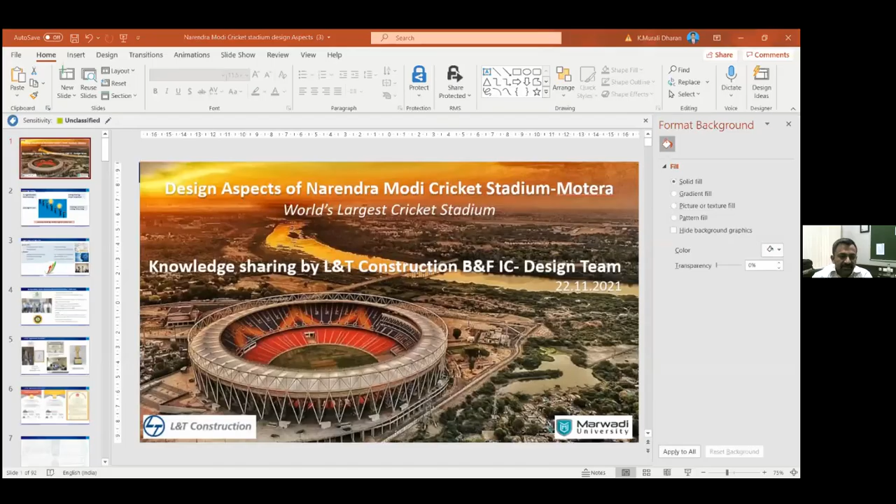So I think, Amit sir, we are done with the introduction of the experts. Yes, okay, so with this introduction, however, due to time constraints, it may not be complete. However, we have put our best efforts to do the needful for the audience because it's very important that to whom they are listening, it should be given a very clear introduction. So I welcome all the experts together at this moment, and now it's over to you, sir, for carrying on with the session. Thank you, sir. Thank you very much, Dr. Ankur. It was a very nice introduction, crisp and sharp. We are very much happy, and I think you communicated everything to all the audience. Thank you very much once again.

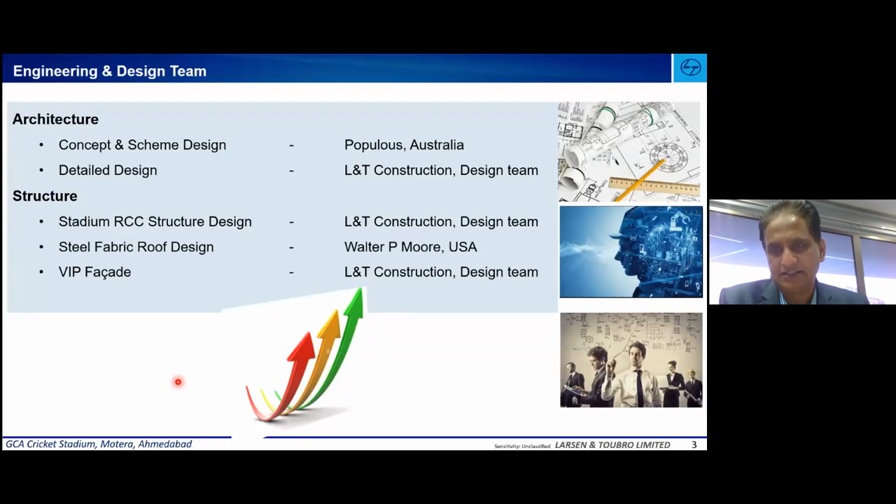As you know, this stadium has, other than the structure and architecture part, we need to concentrate on other aspects, not only the engineering. Along with that, we have to take care about sustainability, green building, green ratings. Therefore, this stadium has achieved IGBC green rating for gold. We aimed for silver, but we managed to get the green building rating of IGBC gold.

Total energy saving of 21%. We use water savings of potable water, sewage conveyance, etc. And 100% LED lighting was provided to reduce energy. More than 40% of the construction materials are procured locally, and 20% of the construction material is procured by recycled content. Usage of materials for low VOC and less carbon emissions was also conducted.

Engineering does not only have to complete the analysis and design. It also has the other part that along with construction, we have to design in terms of quality aspect, concerned with safety purpose. One of the things engineering can contribute is to avoid in-situ concrete and provide precast, so construction will be done in a controlled manner through precast practice, with only erection done on site. There will not be any pollution outside. Therefore, quality and safety can be achieved through design.

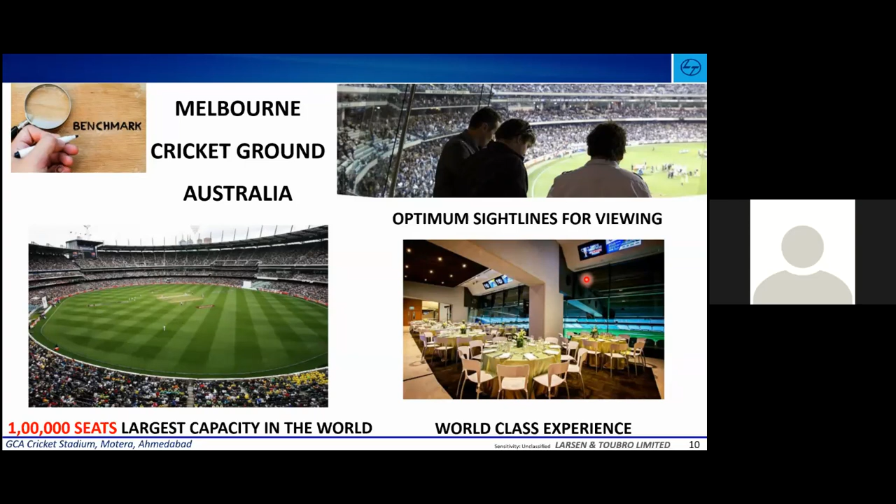When it comes to a stadium or any arena, what is more important is basically the viewing experience. This stadium, I'm happy to say, is perfectly designed as per the Green Guide. The Green Guide is the international safety code for sporting arenas, specifically cricketing arenas, given forth by the UK Sports Authority. At present, this is the only sporting guide available for us to take forward designs of this stature and nature. So what were the main issues we faced during the design?

There was a temple inside the stadium complex, and that was to be retained as it was considered sentimental to the development of the site and to the functioning of the site as well.

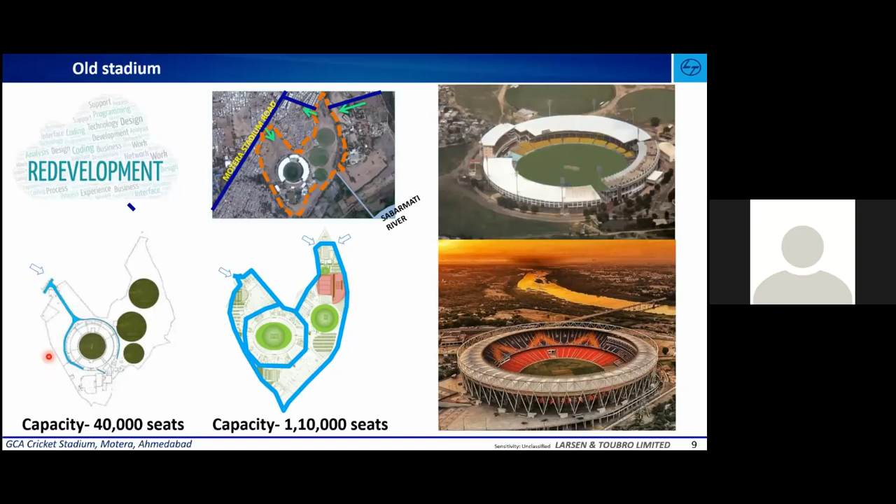The entry and exit - as I earlier said, there was only one entry and exit for this stadium when it had a capacity of 40,000, but now it has been built to a capacity of 1,10,000, to be precise, a little more than what we have achieved. So which means we need to cater to a large capacity.

We need to take into account circulation, exit and entry of vehicular traffic, pedestrian traffic, players' movement before the function, smooth exit after the function, and egress in terms of an emergency - how a person gets out of the stadium within the minimum stipulated time, which as per Green Guide is 8 minutes. So we had to intervene with a lot of new innovations like our Y column staircases and straight flight staircases, which I'll explain in further slides, to meet this requirement of exiting the stadium in 8 minutes.

As I said earlier, achieving the best viewing experience for every single person seated in this arena is the prime criteria of this design. Being such a large stadium, the field of play is also sized as per ICC standards and more or less similar to the Melbourne Cricket Ground.

When it comes to accommodating such a huge population, we can expect so many vehicles. Any code or norm states we need to design parking as per the requirement of the seating capacity. So to accommodate so many parkings, we have achieved nearly 3,000 cars and 10,000 two-wheelers.

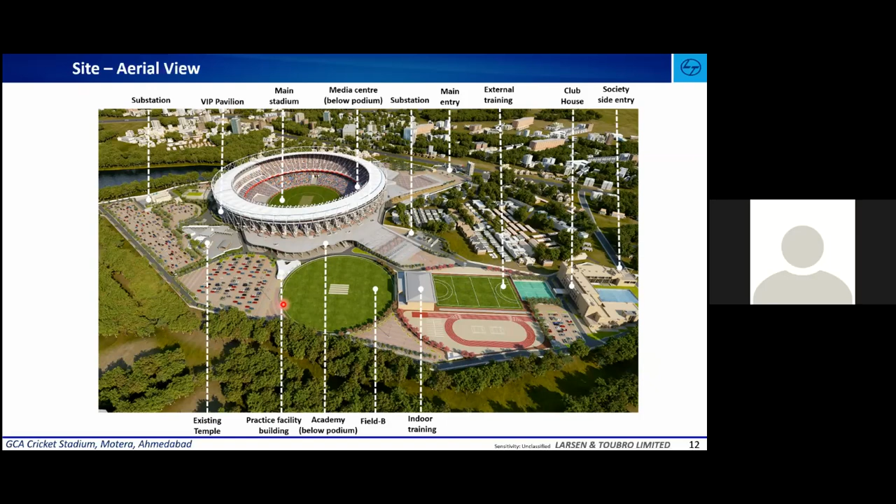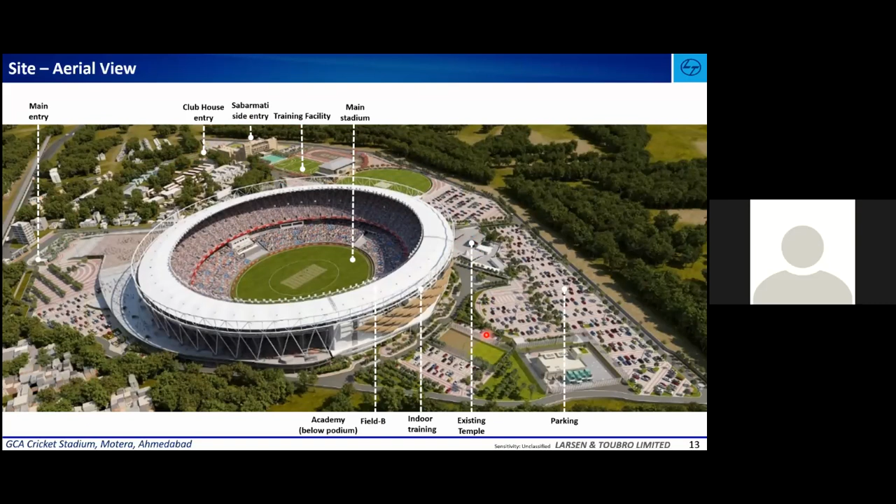There are three entry pockets to this particular site. One is from the Motera Cricket Stadium main road, which is the main entry because here we have the maximum intervention with the main road. The other is the Clubhouse Society Road. And there's a third entry created by the Ahmedabad Municipal Corporation to basically suffice the exit requirements of the stadium. This is the clubhouse, this is the main stadium, this is field B, and the existing temple and other facilities are functioning as part of this stadium complex.

Like I said earlier, there is a super huge podium here, with a main entry and a secondary entry. This is one of its first kinds in India, and this podium does not only cater to facilities for approaching the upper bowl and lower bowl, but also has additional food and beverage facilities and toilets for physically handicapped people. As you can see, this stadium is also designed for disabled people, which is the norm of the day.

We had to make sure that they do not have to go below a certain level to access the toilets. So we've tried to position all the toilets along the periphery of this large podium so that anybody sitting on this arena can really approach the toilet from here.

Any handicapped person who requires access can reach this toilet complex. This stadium is the first of its kind which can offer a 360-degree view while you stand in any corner of the podium, also enunciating other activities like air movement during actual match play conditions. This is the upper bowl access complex, the upper bowl access Y column staircases, one of the most unique features of the stadium. This is a precast structure which will be further explained by my colleague, Mr. Muralidharan, and there is also another straight flight staircase which leads to the upper bowl.

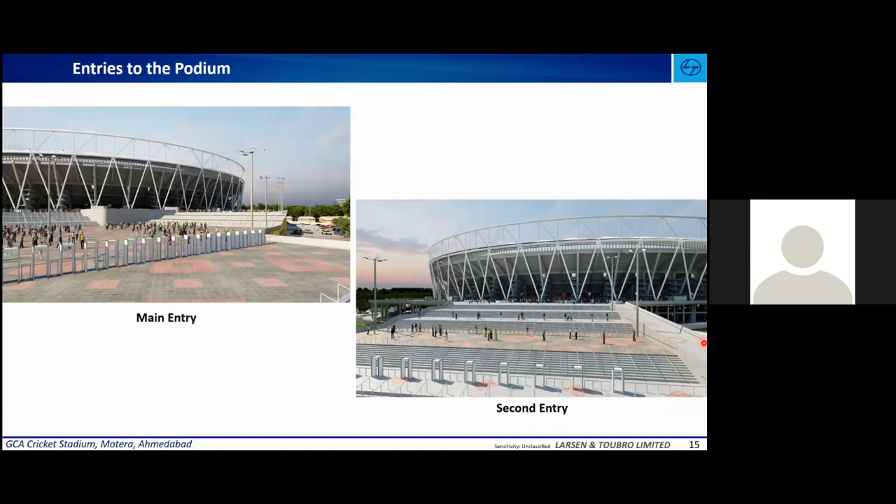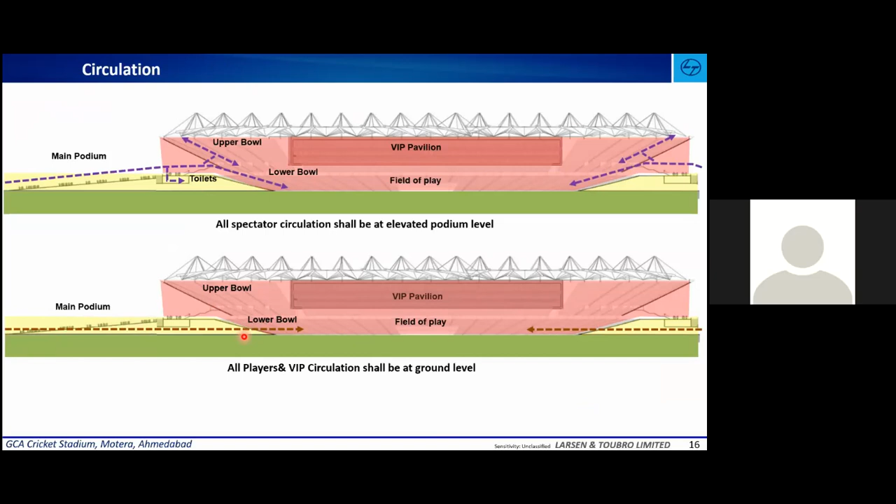The other unique feature is we have tried to basically split the circulation in the stadium into the vehicular movement or the players movement and the main spectator movement. The vehicular movement happens at the ground floor, whereas the main spectator movement happens at the podium. So at the entry, both are separated and taken out into separate approaches. The upper bowl has around 50 rows and the lower bowl has around 55 rows.

It seats around 50,000 seats in the upper bowl and 50,000 seats in the lower bowl. This is the upper vomitory staircase and this is the lower vomitory staircase. Roughly the height of the stadium will be around 35 meters till the top of the tension ring. The upper bowl is partially covered by a tensile fabric, which is 30-meter wide. The erection process and the design details of which will be shared by my colleague, Mr. Raghupati.

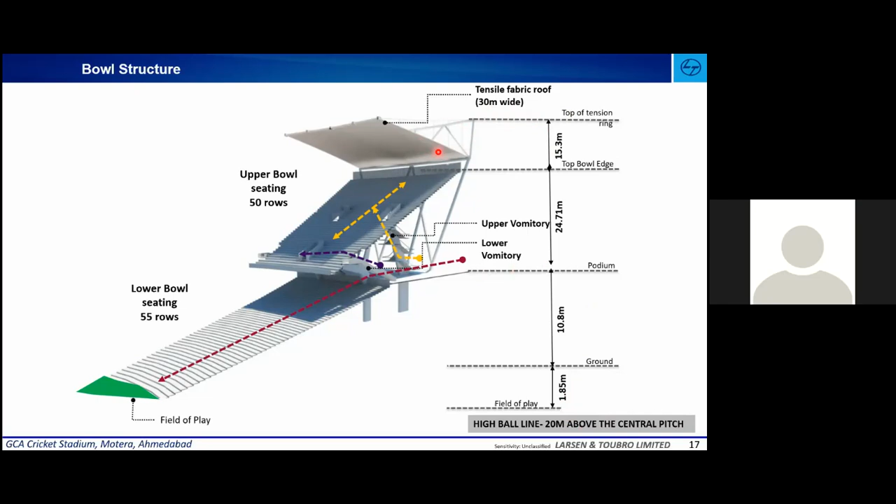Coming to the main building, the VIP pavilion. The VIP pavilion has at its ground floor the GCA office, the testing and support facilities, which are for doping control and first aid, and all those facilities are accommodated on the ground floor. The upper ground floor, as we call this level, is the players level, having the dressing rooms, the gyms, and the allied facilities.

The third level is the banquet level. This has a 400 persons banquet hall, and it also has a team players lounge. The fourth level is the VVIP suites level and the presidential suites level. The highlight of this is it is placed perpendicular to the field of play, where you can have a direct view of the pitches.

This particular stadium also has 4 dressing rooms, the reason being that it has to cater to the T20 format. When we have back-to-back 2 matches, two dressing rooms can be used for one set of match, and the other 2 dressing rooms can be used for the other set of match, which enhances the present playing format and which can also accommodate further conditions.

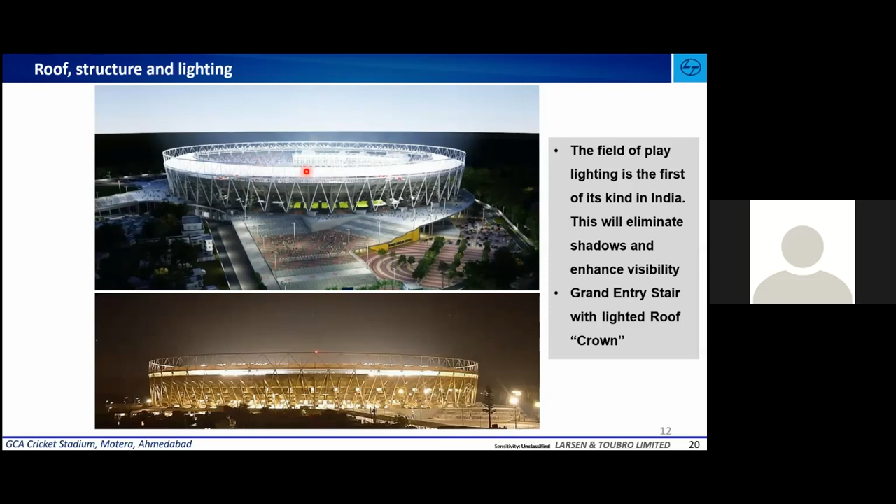This is a unique feature, basically full LED lights. This was done because high mast lights tended to create more light and shadow play during actual match play conditions, so this was done to remove the shadows while at play. This has also managed to create a kind of crown effect when viewed during night from a long distance when the lighting is fully on.

The other main building is the clubhouse. It has a 25 meters by 50 meters swimming pool, designed as per Olympic standards, around 2.4 meters deep. A squash court, badminton, table tennis, carom, cards, TV room, reading room, outdoor children's play area, lawn tennis, outdoor change rooms and sauna, and a kids pool.

There are 50 regular guest rooms and 5 luxury suites, which have additional dining areas as well.

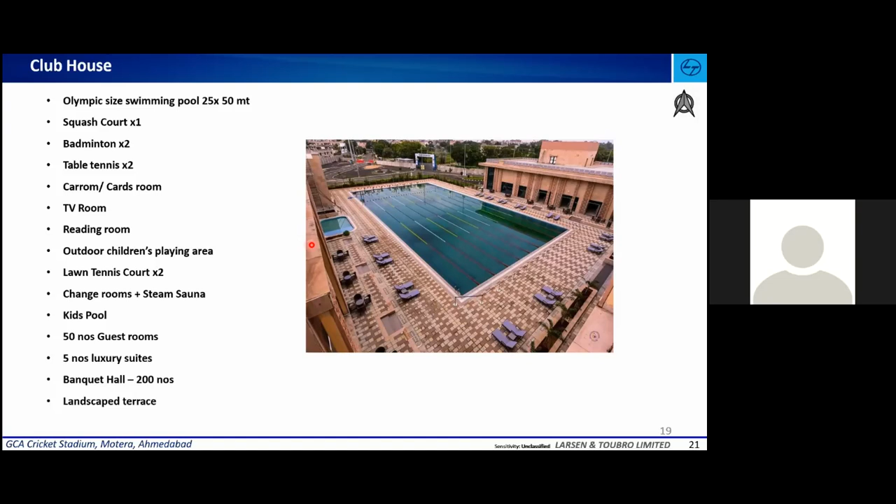The second floor has the suites, and the third floor is basically the luxury suites. We placed it in such a way that we get a good view of all the surrounding areas - the river, the stadium, and all the precincts which create more interest in this site.

These are some of the interior photographs of the clubhouse - the typical suite, the TV room, the badminton, snooker, squash court, gymnasium, and the check-in, check-out lobby.

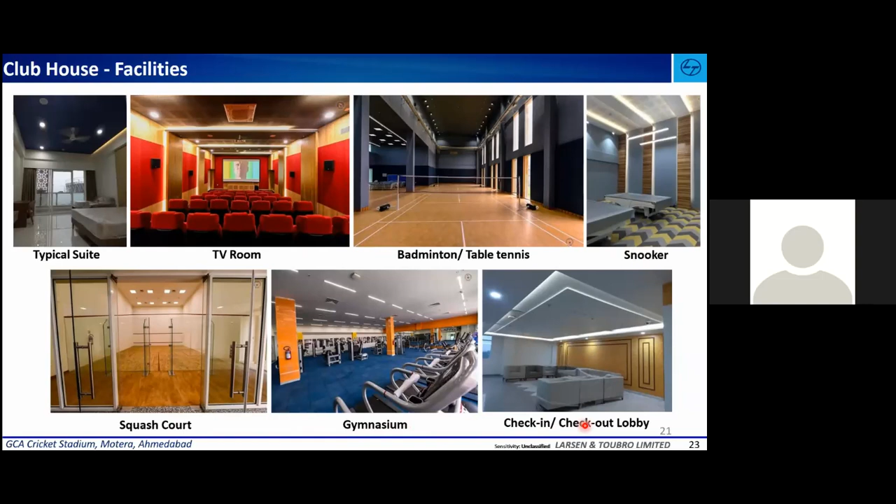This is the front view and the rear view of the clubhouse. This clubhouse is basically centered around the swimming pool, which is a main feature of the stadium.

Therefore, it is also fully cladded with sandstone, and this also enunciates more view and more interest in the facade. It also has GRC Jali. As with earlier palaces and all that, if you see around the Jodhpur region, Rajasthan, most of them were done in sandstone.

So we've captured as many local elements as possible in this, and we have tried to take it forward to create a lot of interest with GRC Jali and sandstone.

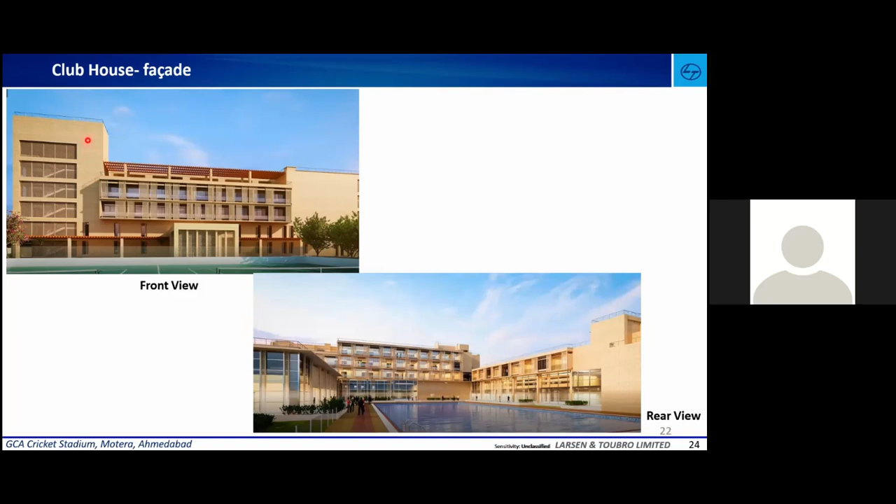This is Muralidharan, and I will take you through the structural aspects covering the uniqueness of the structure, the structural system of the stadium, and about the mega precast elements. Further, my colleague Raghupati will be taking up the structural steel roof and facade elements.

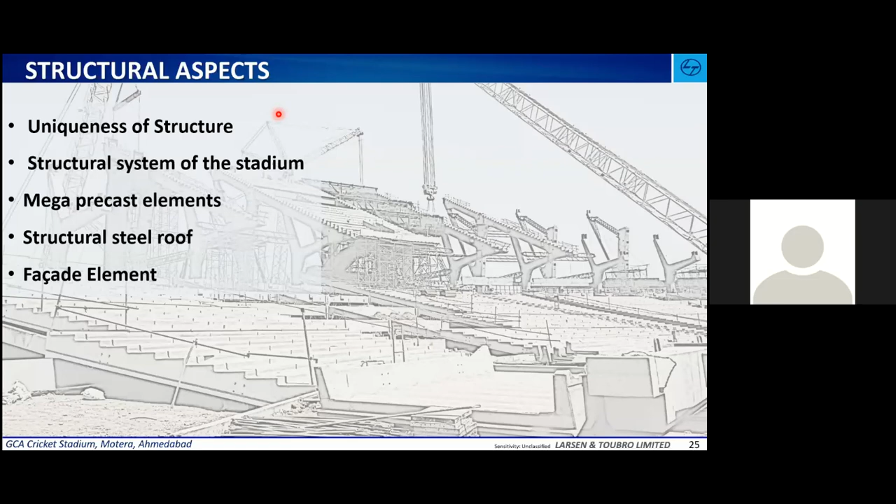We also adopted a unique dry type connection for the beam-column junctions of the upper bowl using structural steel members, which had huge forces that needed to be transferred from the beams to the columns. The maximum weight adopted is around 235 metric tons. There is a bare weight of the Y column, the rear Y column, which is a single piece, asymmetrically shaped and 35-meter high element.

Coming to the steel roof, the upper bowl is covered with a steel roof, which is around a 30-meter cantilever based on the spoke wheel concept. The roof is covered with a PTFE fabric membrane, wherein the FOP lights are placed along the inner edge of the tension ring. We have also used around 5.3 kilometers of precast drains in the stadium complex.

Now, this is the overall stadium bowl without the roof. The structure is radially divided into 6 blocks apart from the entry and exit ramps. We have block 1, which is basically the VIP pavilion, and blocks 2 to 6 cover the general area seating, which has the upper bowl, lower bowl, and the podium structure, and an intermediate structure which basically caters to the toilet areas.

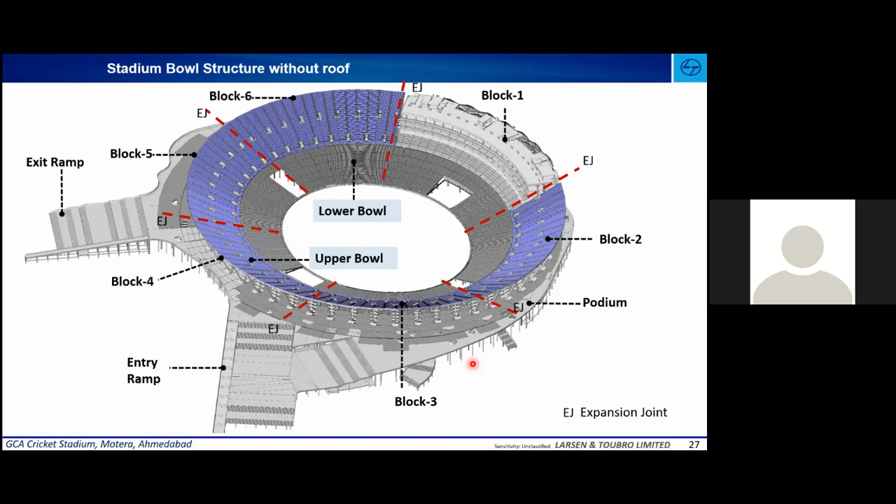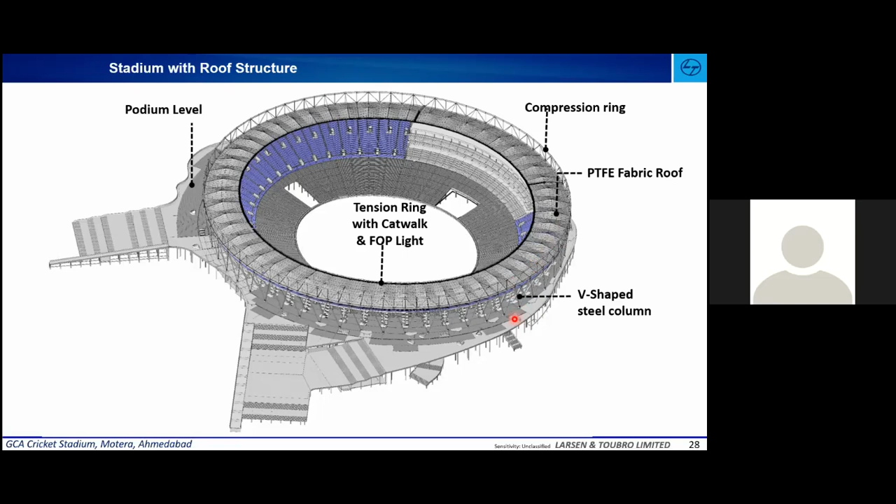We have the upper bowl seating elements with the double L bleacher units. As mentioned earlier, we have two vomitory staircases, upper and lower. And we have the podium level, done with the hollow core slabs. Now, coming to the elements of the stadium, we can categorize into 4 elements: the upper bowl, lower bowl, podium, and the vomitory staircase.

For the upper bowl, we have the Y columns, and we have the radial beams at the top, connected with the circumferential beams. In turn, there are secondary radial beams wherein your seating units are placed. And the lower bowl is done with the radial beams, circumferential beams, and raker seating elements.

For the podium we have the PT circumferential beams, which are post-tensioned beams, and the hollow core slabs are spanned between the circumferential beams. We have also used solid slabs where there are voids left over by the hollow core slabs. The last one is the vomitory staircase. So we'll be focusing mainly on the upper bowl elements, which are more critical.

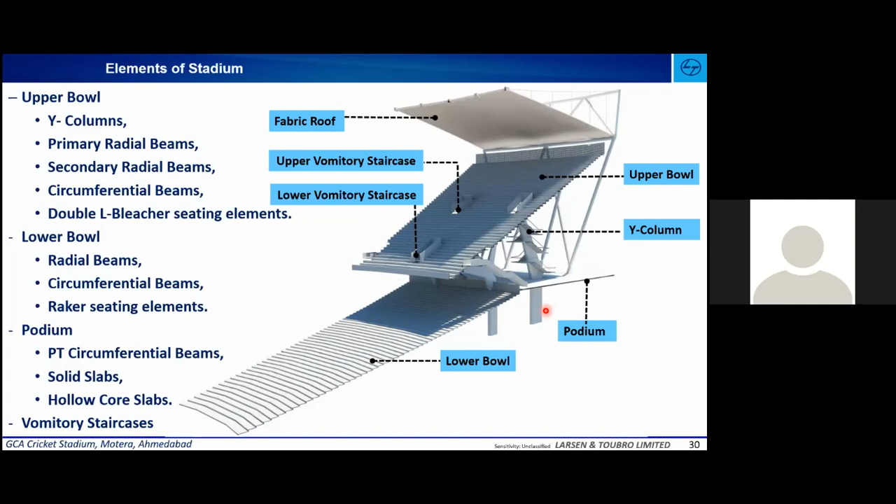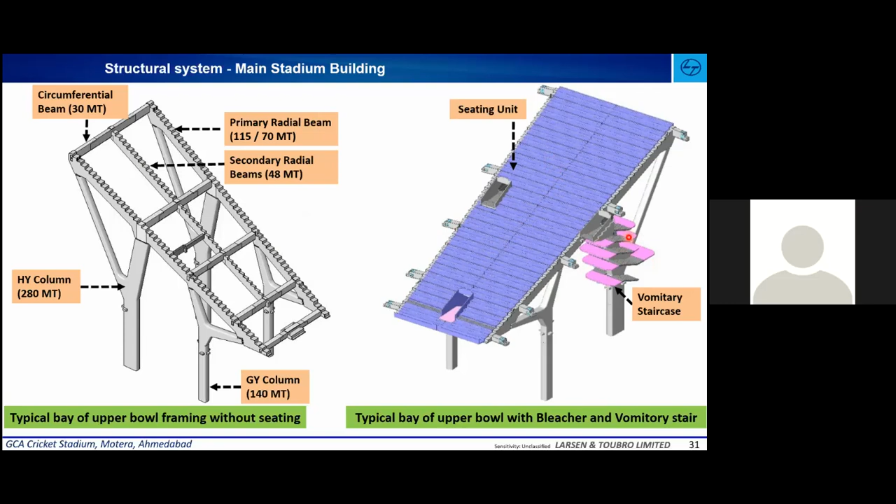On top of the Y columns, we have the radial beams, which is basically a 2-segment element, orthogonally connected with the circumferential beams. We also have a secondary radial beam, simply supported over the circumferential beams. The right image is the same bare structure covered with the bleacher units, and the surface of the Y columns covered with the vomitory staircases.

Coming to the sequence of erection, this is a discretized form of the precast elements, wherein you can see the HY column, which has at the top of the slender arm the dry joints, and for the GY column, both ends at the top have dry joints. Whereas the main arm of the HY column is considered with the wet joints.

Coming to the primary radial beam, it is a 2-segment element. Wherever dry joints are considered, the pockets are left inside the radial beams, which will be grouted with a high strength grout.

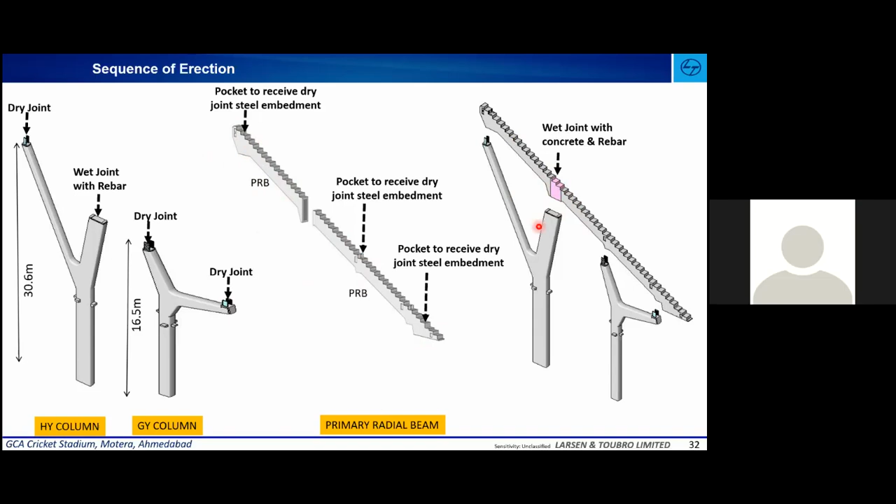Now, what you see here is the wet joint, wherein after placing the radial beams over the columns, the additional reinforcement and shear reinforcement will be tied together, and concreting will be done.

Now, normally when it comes to precasting, other than the normal stresses of moments and shears, there will be enormous forces and stresses during the lifting, transportation, and erection, because the member might not have achieved its ultimate strength at that point of time.

What you see on top of the slender arm is basically the structural steel member placed over the slender arm. This is because at the horizontal position, the slender arm, which is around 18 meters long and has a cross section of 1 meter by 1 meter, cannot withstand on its own. So this prefabricated structural steel beam has been fixed over the slender arm, which acts as a composite beam temporarily during the erection.

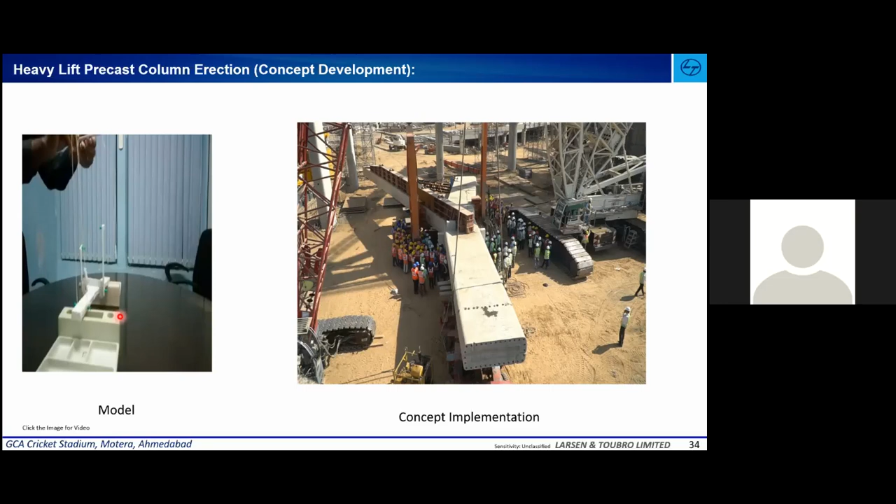As informed, we had done enormous exercise in terms of the various erection sequences. The first one is basically wherein the element is being lifted from the casting yard to the stacking yard. You can see the element is lifted using a single crane with multiple spreader beams, so it is simultaneously lifted to avoid any kind of differential movements.

The second image shows the tilting of the HY column from the horizontal position to the vertical position. This is a unique method wherein we have considered C clamps. There are two main cranes. The C clamp is being lifted by the main crane, and we have one tailing crane. The C clamp is positioned just above the CG of the member, and when the C clamp gets lifted, the element rotates and comes vertical. So what you see on the right side is the corresponding member behavior.

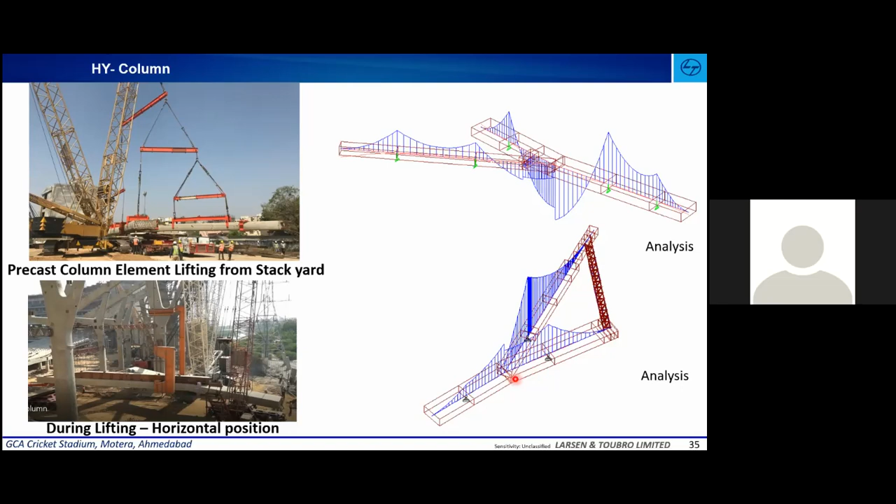So what we have done is tied together the slender arm and the main arm with a tie. Till such time the primary beam is placed over the column, this tie holds the slender arm with the main arm.

Now coming to the primary radial beam, as informed, there are two segments of the primary radial beams. The elements are cast horizontally, meticulously transported to position, lifted using the cranes, rotated to the actual position, then lifted. On the right, you can see there are holes at the bottom of the beam.

These are the slots provided in the primary beams during casting. This will go inside the structural steel embedments which are placed in the column.

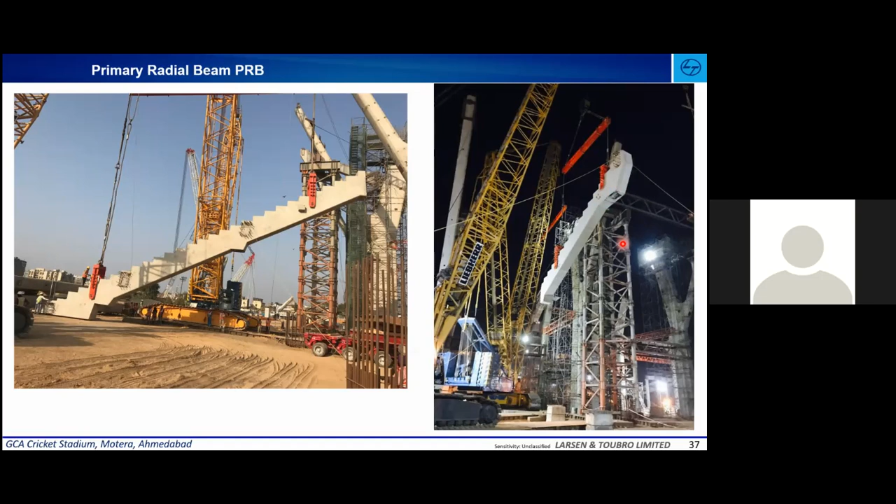Now the dowels in the circumferential beams are connected to the dowels from the primary radial beam, and then additional shear reinforcements are placed and concreted. So what you see is the shade difference - this is the precast zone, and these are the cast-in-situ zones.

After casting the circumferential beams, we have the secondary radial beams which are precast and simply placed over the corbels in the circumferential beams. This is basically to bifurcate the span of the double L bleacher units, which spans between your primary radial beam and the secondary beam.

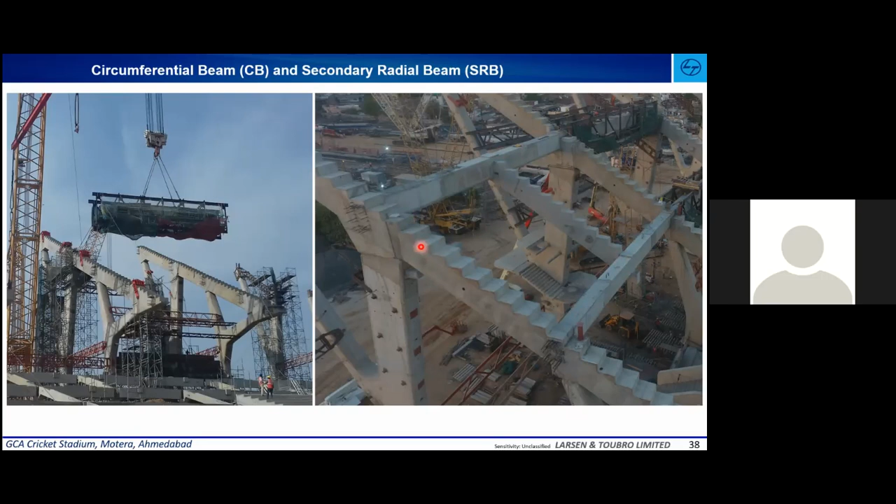And this is your completed view of one typical bay of the upper bowl with your primary beams, secondary beams, and circumferential beams.

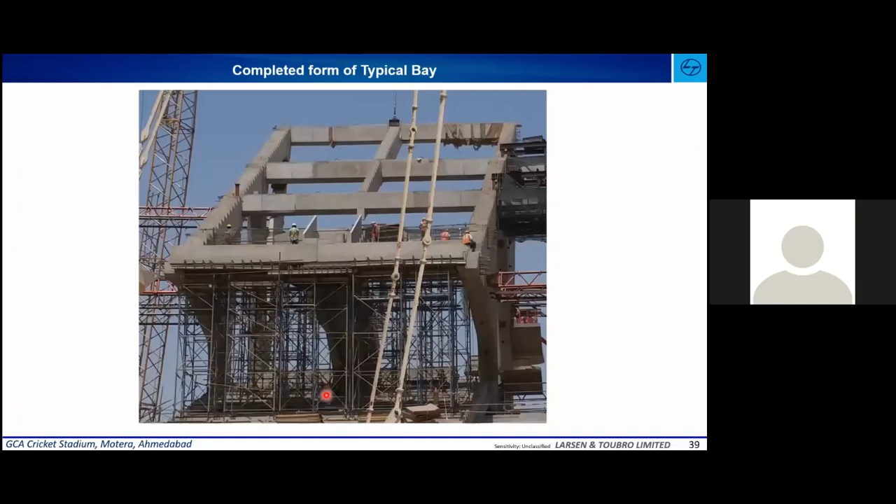Now coming to the dry joint connection, this is one of the unique methods we have adopted. Basically, the shear and axial tension from the beam is resolved to axial compression and shear in the column. In addition, the unbalanced moments from the beam are also transferred to the column.

Now the structural steel element embedment length has been calculated based on the limiting stress in the concrete, which is 0.447 FCK.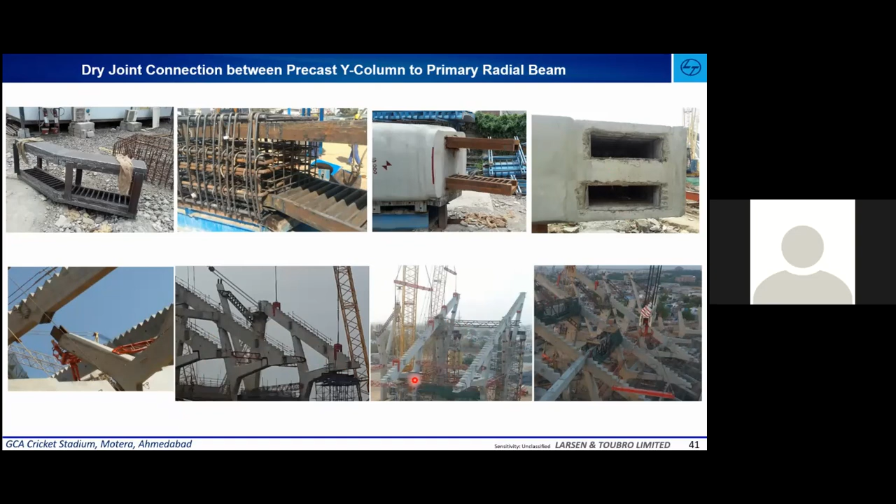So this is the position of the beam, being directed and progressed and placed over the column. Now this is completed, after being erected, how it looks like. And there are other images which represent the completed form of the primary radial beam after being erected over the columns.

Now coming to the seating elements, we have used two types of seating elements. One is the double L bleacher units, basically for the upper bowl, and second one is the raker seating elements for the lower bowl. The main difference is that your L bleachers will be spanning between your radial beams, and your raker seating elements will be spanning between your circumferential beams.

The main intent of going for the raker elements is that you have lesser riser heights for the lower bowl, so we have used these raker elements, which cater to the element spans between the beams on either ends.

So this is a completed form of the stadium with the seating units. As such, there will not be any differentiation seen when you look into the element types.

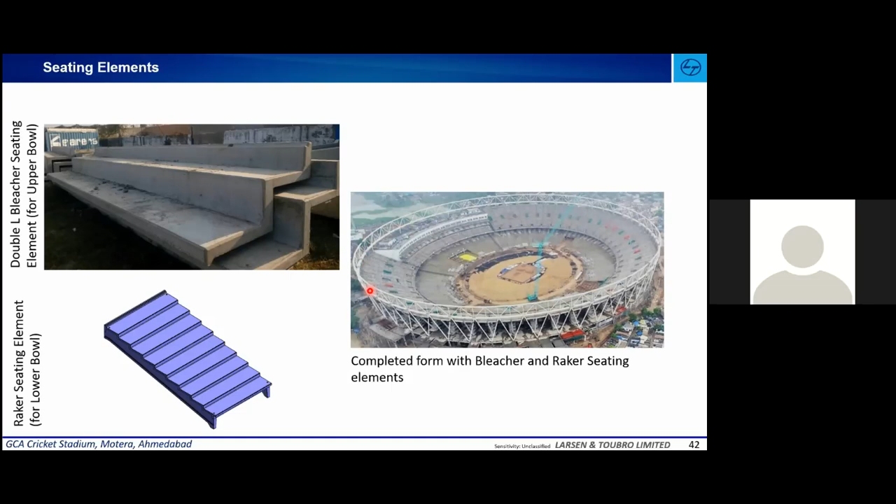Now coming to the bearings, we have used two types of bearings, with anchorage and without anchorage, depending on the vertical loads and the shear. There are around 549 numbers of bearings being used, predominantly of the non-anchorage type.

Coming to the vomitory staircases, we have two vomitory staircases to access the upper bowl. The one with the lower vomitory staircase basically comprises two RC walls on either side, connected with the landing slab in between.

So what we have done is the entire unit is fabricated on ground as a single unit and then lifted as such and placed in position. That's how the lower vomitory staircase has been done.

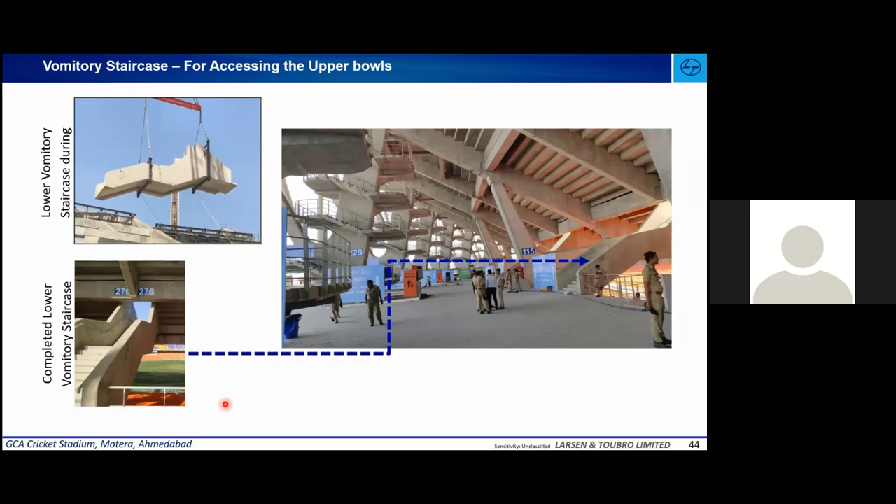Coming to the upper vomitory staircase, the architect's intent is to utilize the surface of the column for accessing the upper bowl. The main requirement was that there should not be any intermediate columns for supporting the flight's landing slabs, and also the flight has to be sleek without any kind of protrusions.

So there are a total of 42 numbers of such staircases along the podium.

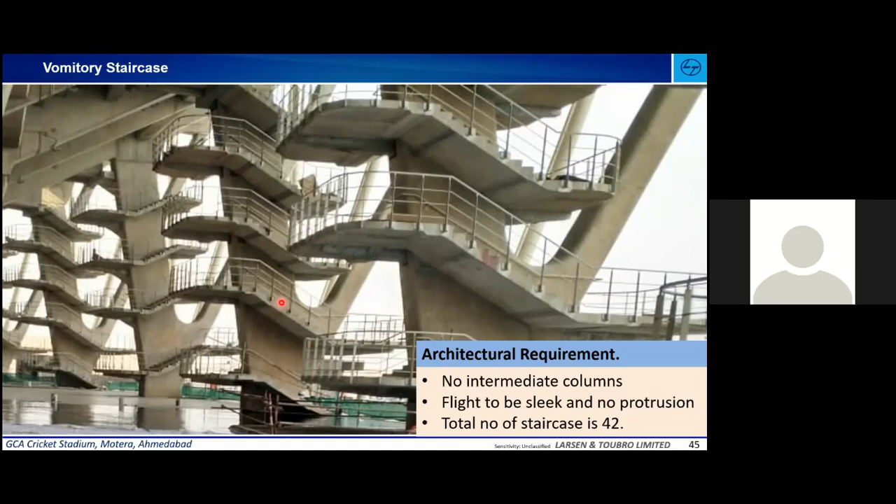Now, getting into the discretized form of the vomitory staircase, you can see we have the landing slab, which is cast along with the structural steel beams, and this is welded to these steel inserts. These inserts are positioned with careful planning in the columns while casting.

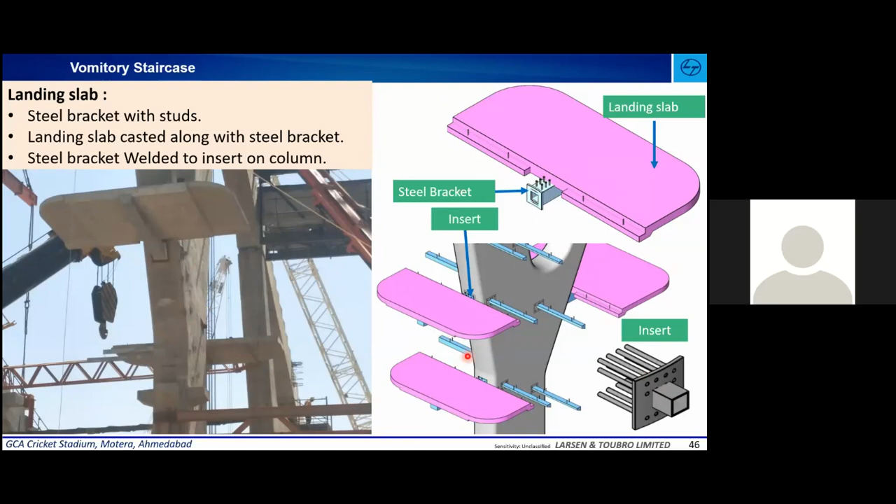So the landing slab along with the steel bracket is welded to these inserts. After the landing slab is positioned, we also have structural members which are orthogonally placed over the surface of the columns. These members are again welded to the surface of the column.

Then we have the main waist slabs, which is again bifurcated into three segments. The main segment, at the center, is the largest span placed over the steel beams. Then we have the small segments which are supported on the steel member and the landing slab.

Now, in general, stadiums are susceptible to vibrations because of crowd movement. So we have analyzed and verified the stadium based on the IStructE recommendations, which provide 4 scenarios. We have adopted the Scenario 3, which suits our stadium requirements, and we have verified the vibration analysis using Route 1 and Route 2 types.

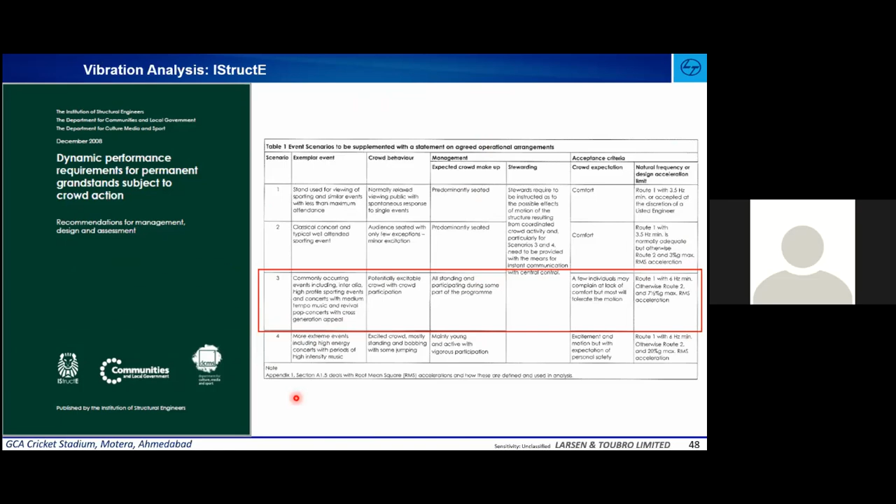Basically, IStructE gives recommendations for permanent grandstands, applicable for constructions ranging from RCC, pre-stressed concrete, structural steel, or any combination of the above. However, this provides only for the dynamic action of crowd activity.

Now, in India, we are crazy people over cricket. So crowd rhythmic action will excite the structure at its natural frequency, which will result in discomfort and panic to the crowd if it is not addressed.

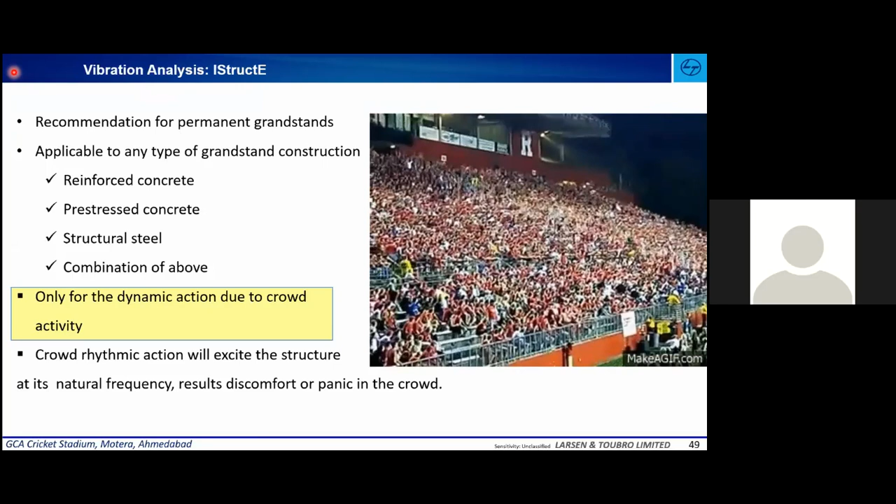So there are two methods to verify human comfort as per IStructE: Route 1 method, which specifies the minimum values of natural frequency, and Route 2 method, which specifies the maximum acceleration limits.

Now, based on the mass of the structure and mass of the crowd, we have estimated the acceleration based on the graphs provided by IStructE.

To end the concrete part, we had also applied for patents under two categories: one for the precast portal structure having precast elements with dry connections, which is a unique method adopted for the stadium, and second for the raker seating elements for the lower bowl. So these are the two items for which we have applied for patents.

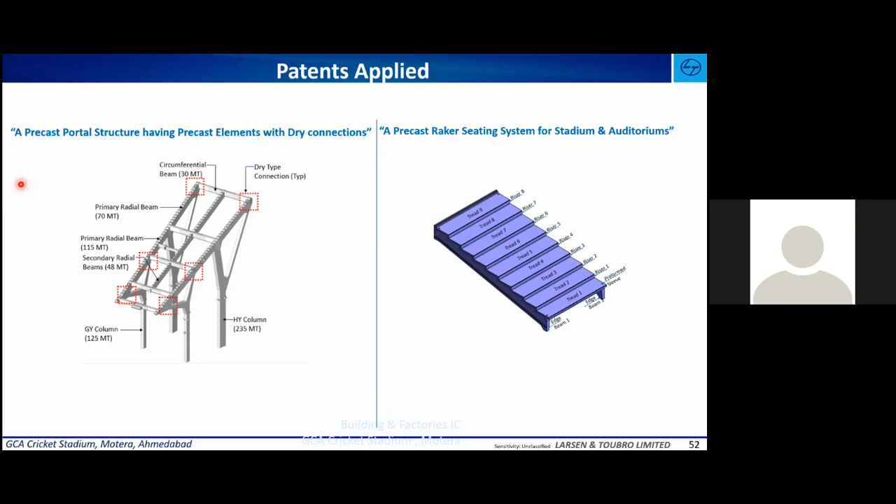This is the topic regarding the roof structure of the stadium, which is a unique structure. Normally this type of structure has not been done before in this way. This type of roof has been done in football stadiums earlier in Europe and other Western countries, but for a cricket stadium, this concept is being done for the first time.

How it works is there is a concept known as a simple bicycle spoke wheel. A similar concept has been adapted here, where in the bicycle wheel we have a central hub and an outer rim which is connected with spokes, and it is tensioned so that the load is transferred.

Similarly here we have an outer compression ring, a steel compression ring, and an inner tension ring with cables, tied with radial cables connected to the top and bottom compression ring. We also have a valley cable which forms a drainage pattern, so that rainwater falling will be collected at a gutter at the edge of the compression ring, and a downcomer pipe will take it to the ground level and transfer it to the drains.

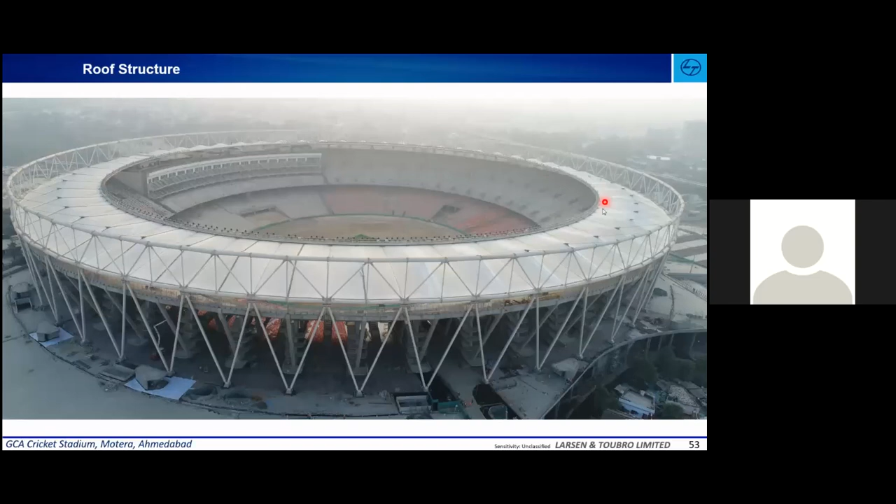Coming to the roof structure, you can see this segment. We have each segment between each grid. This compression ring forms a steel element having a V column, with a top chord, bottom chord and top chord connected by braced members, forming the compression ring.

Then we come to the inner tension ring, which has a set of 4 cables tied together with weldments, and then connected with the radial cables. This is known as the ridge cable, and this is the inner cable which forms a sloping shape.

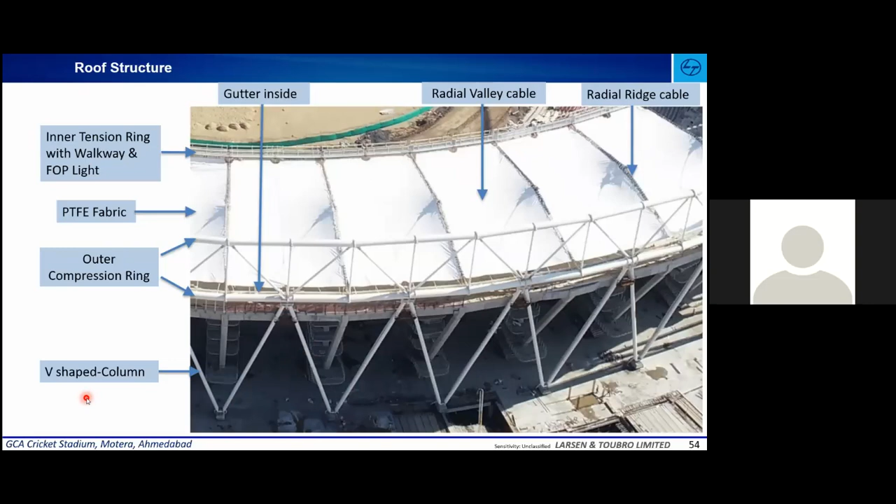Naturally it will drain the water from the roof. Finally, this V column will be supported on a concrete pedestal which is independent of the main bowl structure, which we can show in the next few slides.

So this is the V column, which has been connected to the concrete pedestal, which will be connected to the foundation directly. This bowl structure is isolated by means of bearings which will not transfer any lateral load. So this column and roof structure is an independent structure.

Similarly, in the VIP pavilion, we have 4 mega bearings resting over the building, and the roof has been connected to these bearings so that no lateral load is transferred to the building.

Coming to the materials used for the stadium: the compression ring is made of huge pipes with diameters ranging from 355 to 1050 mm, which have been fabricated separately. The tension ring is made of 90 mm cables known as fully locked cables, which you can see here in the picture.

It's not a regular pre-stressing cable. This fully locked cable has wires shaped like a Z, which gives a better elastic modulus value, so the strength is also higher than regular cables. It is connected by means of weldments, and you can see these types of sockets are pinned to the structure.

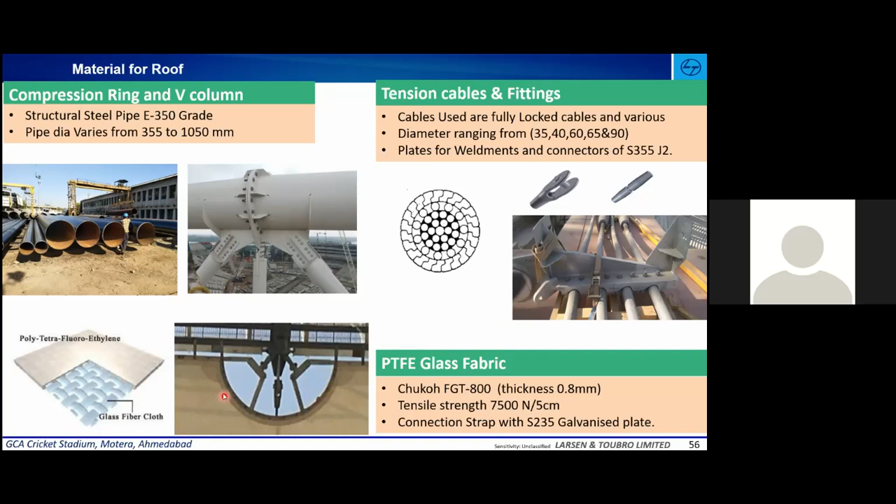The third material is the covering of the roof by means of PTFE fabric, which has been imported from Japan by the agency and manufacturer known as Chukoh. Its properties include a tensile strength of 7,500 Newtons per 5 centimeters, and it has been connected by means of galvanized plates, which you can see here.

Coming to the design point of view, as I earlier told, this has been independently designed because it is not connected with the bowl structure. This analysis is done by means of software which will perform a nonlinear analysis. The concrete column has also been modeled along with this to form a single unit. This is the location where you have the VIP pavilion, where we have a V-shaped column, which we will fix with a bidirectional bearing, as shown earlier.

This roof structure doesn't have a huge dead weight because it's a lightly loaded fabric structure. The fabric has a load of around 0.02 kilonewton per square meter. Apart from that, you have FOP lighting over the inner tension ring, and the self weight of the structure. There is also an inner walkway provided to take care of maintenance of the structure.

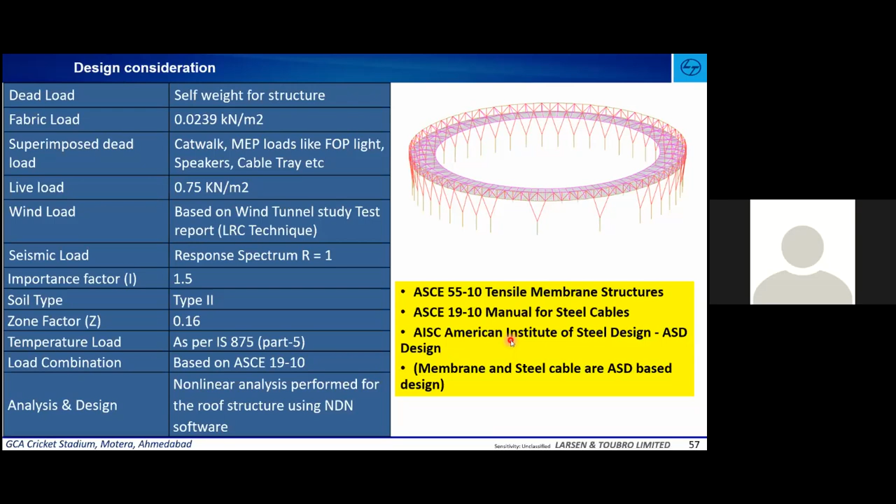Due to this flexibility and the shape of the structure, we had to do the wind analysis by means of wind tunnel study, since we don't have specific tables or criteria in IS 875. So we needed to go for the wind tunnel study.

This wind tunnel study has been done for around 36 directions, with each direction having 10-degree increments. We made a prototype model at a 1 in 400 scale, and it was done in Sydney by the agency known as Windtech.

With that, we did analysis with the NDN software and got the member forces and design by means of the software. These are the stresses and design limitations which were found out from this software.

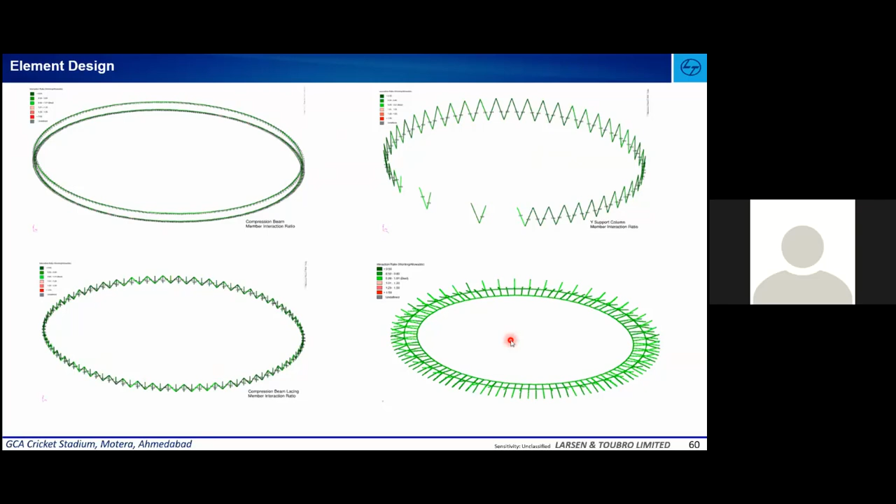The membrane has also been designed with nonlinear analysis, and the stresses have been checked with respect to the allowable stress of the membrane.

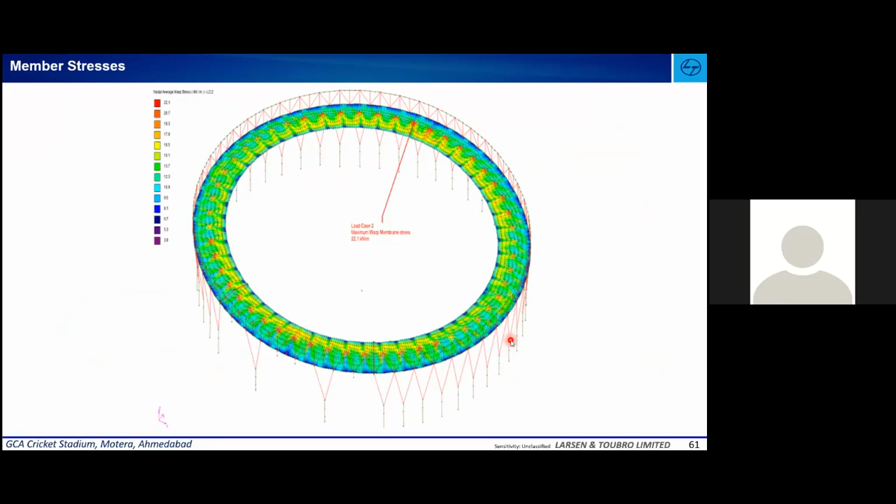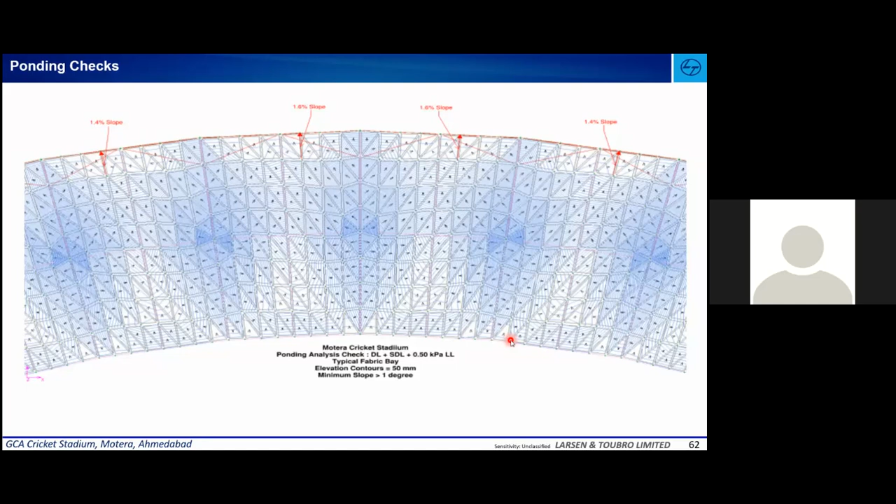Finally, we also checked the form finding of this membrane, because whatever shape it forms, it needs to drain the water that comes due to rainfall and other water stagnation. That has been checked, and it has been found to be okay.

Now coming to the erection process, because here the design does not stop with only completing our analysis and giving the drawings to the site. It extends to the erection of the structure, because it has three different materials: structural steel, fully locked cables, and PTFE fabric. There should be erection accuracy taken care of in the construction stage.

At each stage of construction, we need to check the geometry of the structure, as well as the tolerance, and whether any secondary stresses have developed or not. These are the various challenges we went through during the construction stage as well.

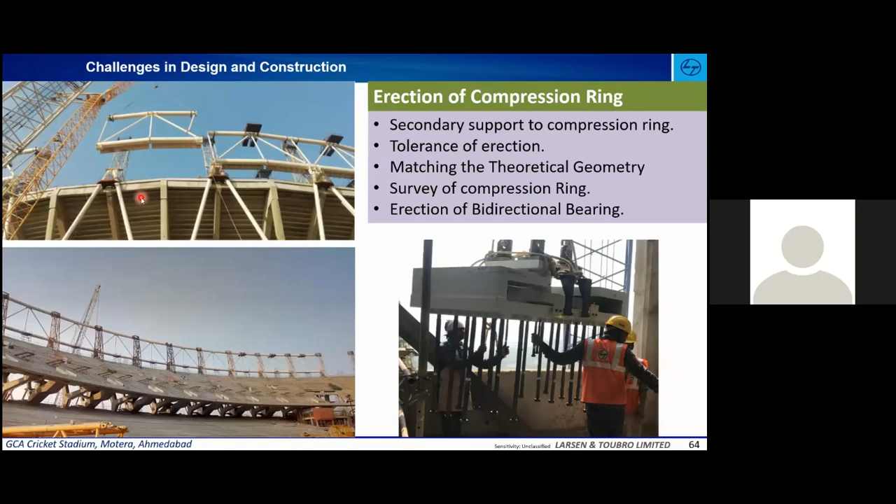For each segment erection, we need to provide a temporary truss, which will form a stable element.

Unless you complete your complete ring, it needs to be a stable structure. So we need to provide this type of temporary element to support this one. For this V column, we have a temporary arrangement which has been fixed and it will be clamped in the bowl structure.

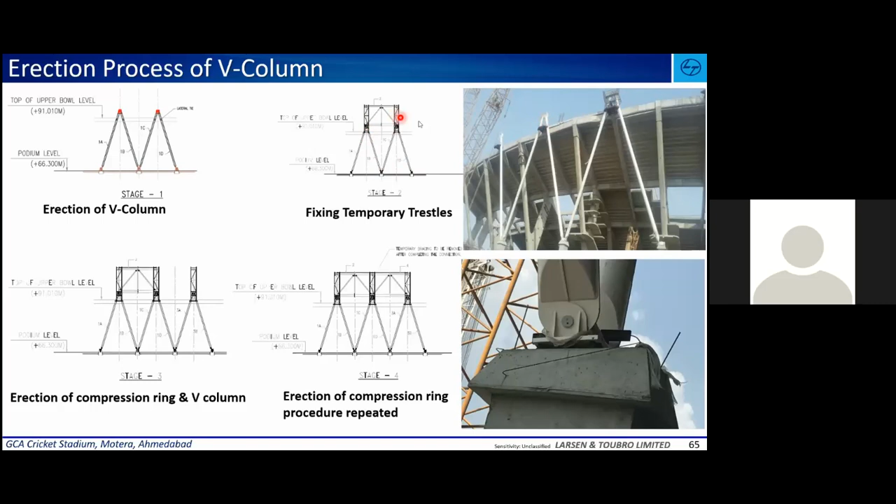While doing the compression ring, we have this type of trestle, which you can see in the next slide. It will be fitted on the bowl, and then connected to the compression ring. So you can see here in these images. This is the one segment which has been formed. Similarly, for each segment, you need to go for a temporary trestle.

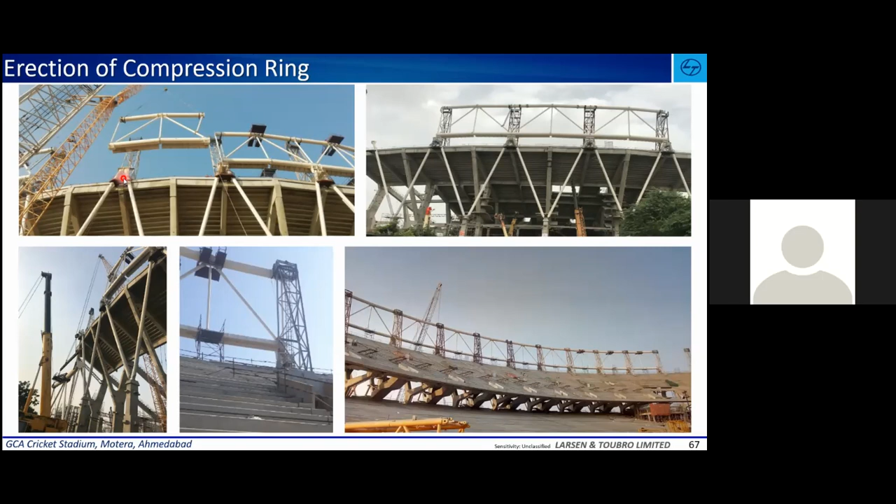Once you go to the semicircle, you can remove the alternate temporary trestle, so that at each stage of erection we have analyzed separately the secondary stresses due to wind applied during the erection stage, and also checked it. This is the sequence and how it has been erected, and finally the compression ring has been completed. This is the stage where the steel erection has been completed.

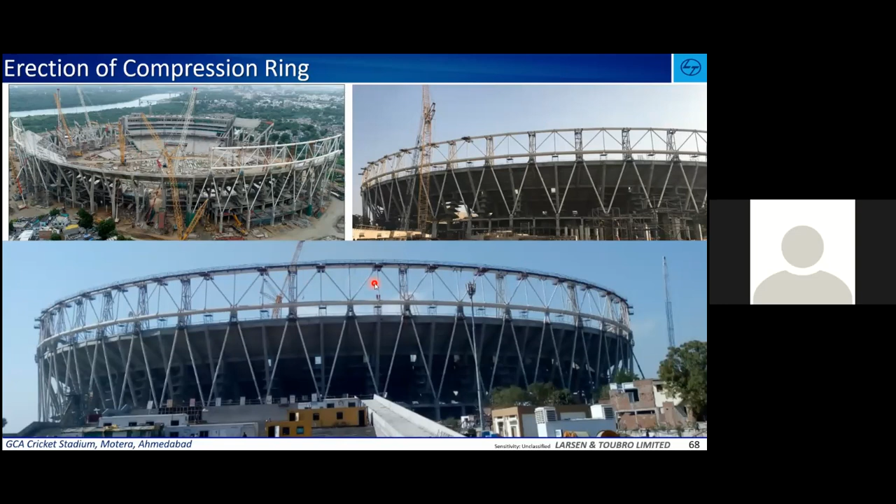Now coming to the cable installation, we have three stages of installation. One is the big lift, where the cables will be placed over the compression ring, and in a synchronized way we need to pull this cable and bring it to position, to the roof at this level.

So all these cables have been tied by means of a jack at different levels, and these need to be stretched and brought to this position. This is known as the big lift, and at each stage of lifting and fixing, we need to check the geometry of the compression ring.

It should not deviate from its theoretical geometry. So we have survey points at each node of this compression ring. For each stage of erection, we need to survey this point, and check whether the theoretical points are matching with that.

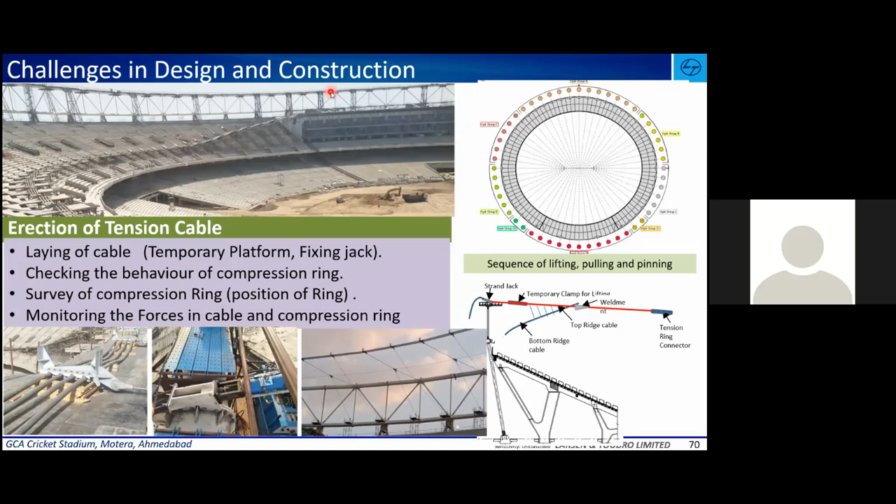The designer has given stringent tolerances which need to be matched. If anything goes wrong, we need to communicate to the designer, and ask them how to bring it back to position, or whether any sequence has to be changed. This is how it has been done.

Before going to this big lifting and all, several site preparations need to be done. One is we have to make a walkway above the compression ring. These are the temporary walkways which we need to provide to fix the jack, and also to go and survey along this compression ring.

So this is the temporary platform which has been provided above that. You can see in this top compression ring, this is the temporary walkway. Apart from that, you have a radial cable coming at each grid, and this is your tension ring. So before going to the big lift, this needs to be placed on the bowl, and then fixed to the jack which is kept on the compression ring.

For pulling that cable, this needs to be kept on a temporary wooden platform. Why? Because if you keep it on the bare concrete structure, once you pull this cable it will be damaged, because it is a galvanized cable. It will form an abrasion on the cable. So this needs to be properly handled, and many site preparations have to be done before lifting of this cable.

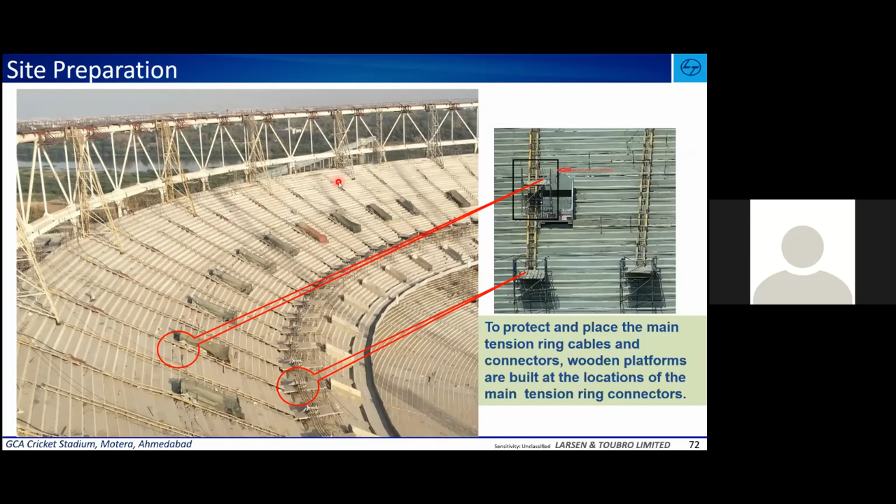After that, these are some of the techniques which have been adapted at site to lift the tension cable and place it over this platform, because these are heavy cables, having more than 10 to 20 tons. So it has to be lifted and kept in position.

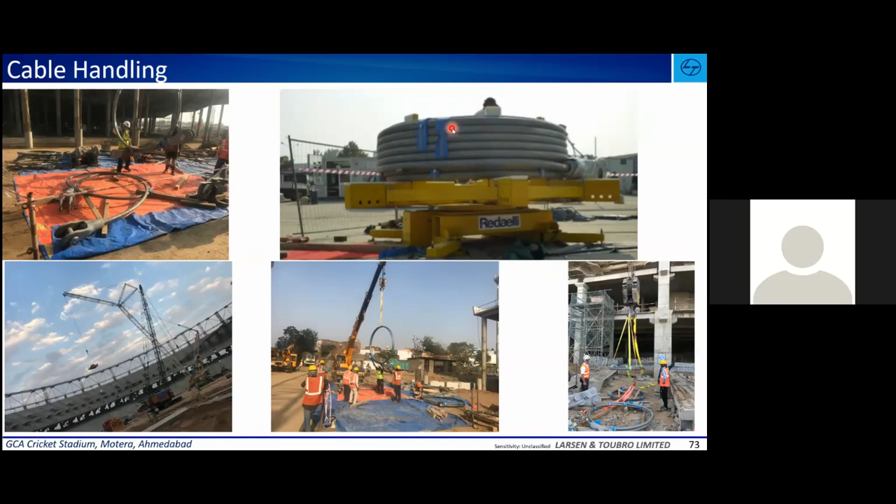So huge cranes and equipment have been taken and placed over these platforms and rolled over that. You can see here, this is a VIP pavilion, and here you are seeing huge platforms which have also been provided over that to bring it into position.

See here you can see the cables. This jack has been fixed over the compression ring. We have provided some arrangement over the compression ring to fix this cable jack. Such jacks, around 52 number of jacks, has been kept at each node. Here the big lift we have to lift in a synchronized manner so that no secondary stresses will be developed on the cables as well as the compression ring.

So these cables have been fixed with this temporary clamping arrangement and then fixed to the cable. Once this comes into position, then it will be pulled and you can see these clamps will be fixed to this. There will be some projections from the compression ring. You can fix on that.

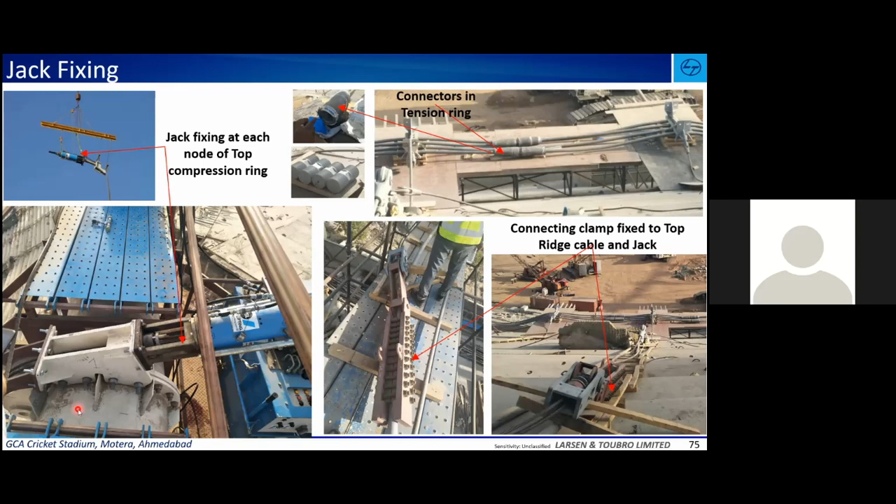So coming to the big lift, as I already told, these cables will be fixed and kept over this bowl and need to be pulled and brought to the position. It has temporary clamps and strand jacks will be fitted. These are all the points where the jacks have been fixed in the plan. So all these jacks have been stressed equally.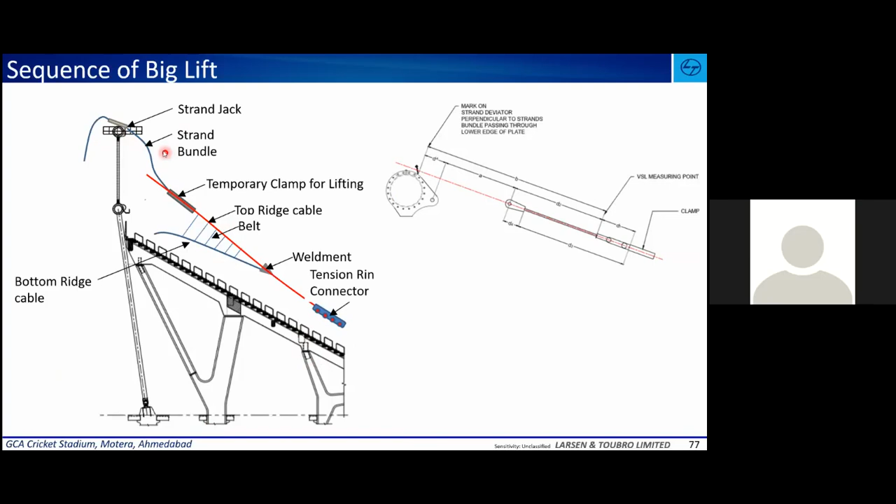See, this is the final stage of your big lift where your top ridge cable and your tension ring come into position. So you can see here is the jack. This is the sequence where your big lift has been completed. So all your 52 nodes have been pulled together and have come to this position.

And now after coming into position, you need to bring this cable. See here, this is the temporary clamp. You have the cable points. So now the end point needs to be brought to this position and pinned to this point of the compression ring. So this is how it has been clamped to this compression ring.

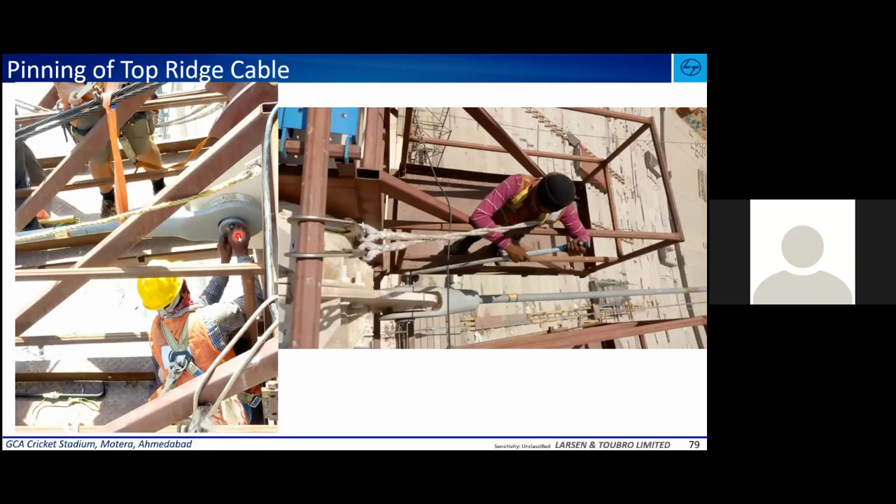So all your top ridge cables will be pinned. So now your total big lift of the top compression ring has been completed.

The next sequence is to pull and pin your bottom ridge cable so that you will form a shape like this.

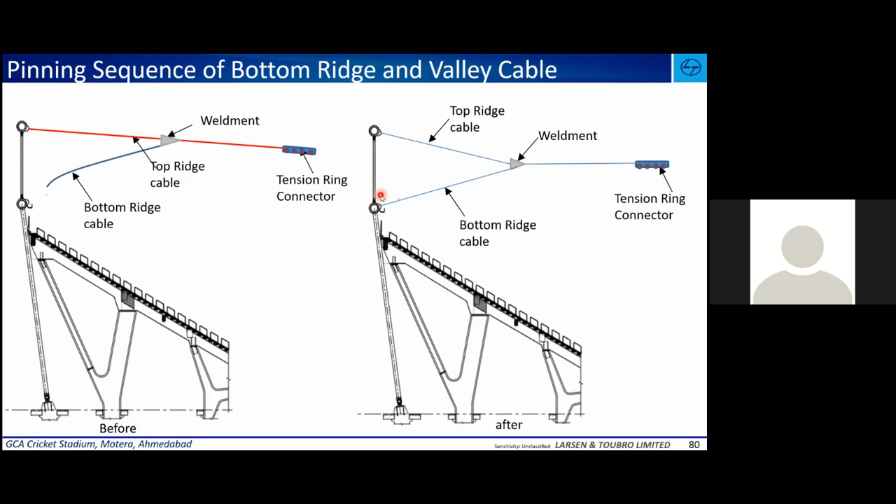So here also we have a different sequence for each cable that needs to be pulled and pinned to this compression ring. This is also analyzed for each stage of pulling and pinning. The forces have to be checked for each stage, and we need to survey this compression geometry to check whether any abnormal deformation is coming on the compression ring or not. So these things we have to discuss along with the designer, coordinate, and bring to this position. And finally, this will be pulled and pinned to the bottom compression ring.

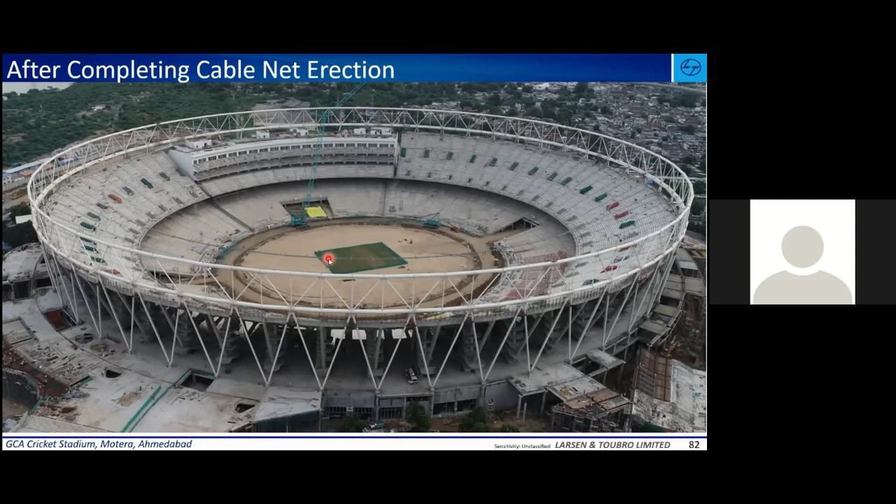So after completing your pinning, you can see these cables have been positioned and pinned to the bottom and top compression ring. So this is the final stage of your cable laying and fixing to the compression ring.

After all this, it needs to be covered with the fabric. Here also the fabric has been done like panels. You can see the yellow thing. Each panel has to be fixed, and during this fixing there will also be a sequence starting from one point to another, done as a segment only. Before doing this, we also need to do surveying and check that the positions are okay.

After that, the first stage of the process is we have to fabricate these clamps and all in the fabric and bring them to the site. And during the erection of each panel, we have to do this temporary platform.

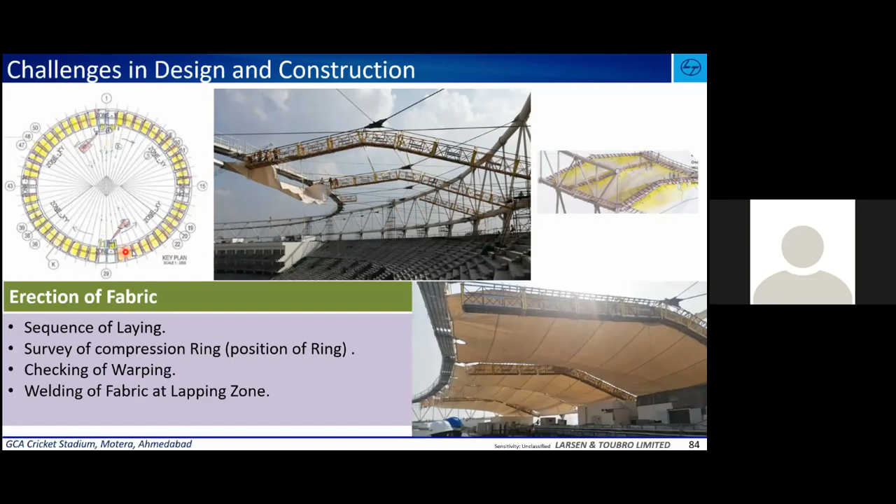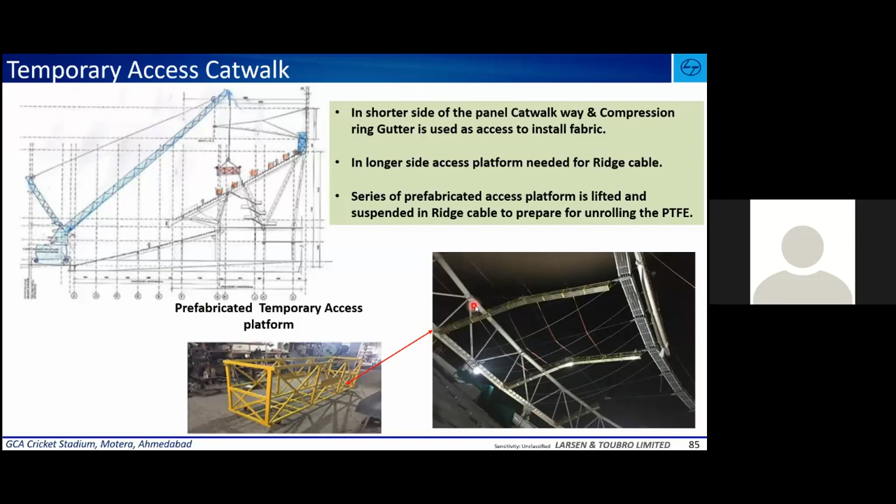We need a temporary platform where your fabric will be brought as a roll to the site and lifted at this tension ring side, and then it will be pulled to the compression ring by means of people who will be kept at this location on either side. They will pull this fabric and bring it to this position, and temporarily fix it by means of ratchet belts. Same way, each panel will be brought and fixed to the place and fixed to the ratchet belts. You can see here this temporary platform which is being brought and fixed to the ridge cable.

And at the ground level, there will be a roll kept on the spindle, and it's been lifted to the tension ring location.

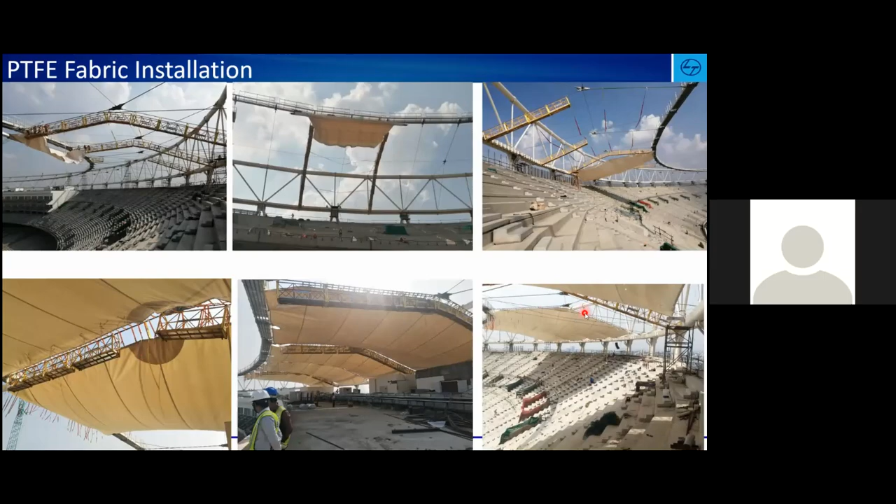So you can see this, they are pulling the fabric at the top level and bringing it to your compression ring, and they are fixing it with the ratchet belts. So this will form each panel, and finally they'll start the clamping of your fabric to the cables. It will form a fabric, the final shape will be formed here. This is the completed shape of your fabric and the roof.

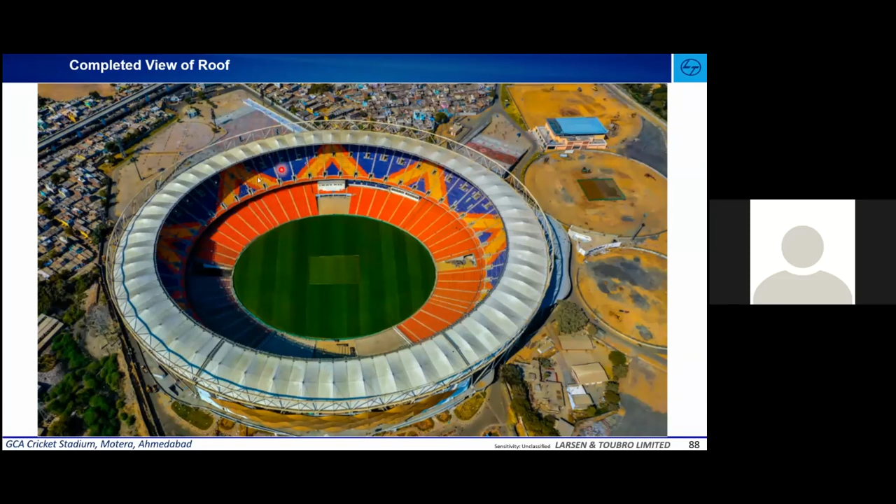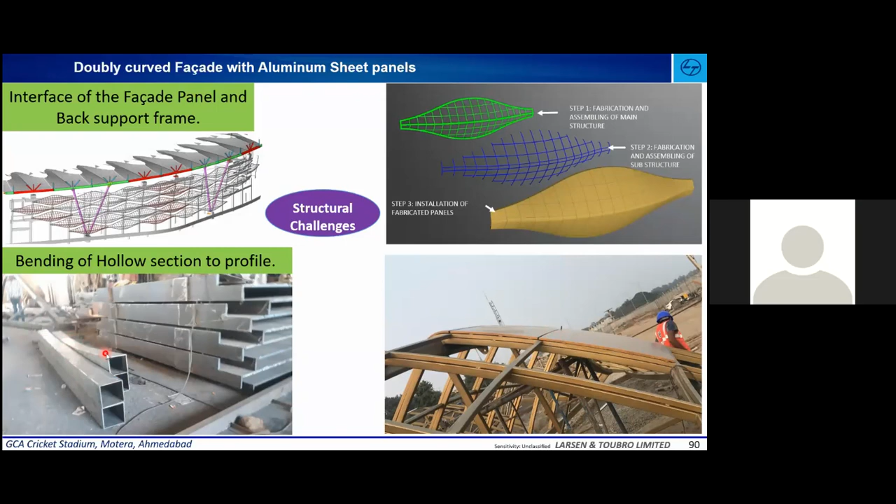Then we used a hollow section for doing this back steel frame, because this has a doubly curved profile, so it needed to be bent to shape. All the hollow sections needed to be bent to the shape, and we did this at the factory, making different mock-ups to achieve this shape. Finally, this is the profile which we got, and it's been erected. You can see it in the picture.